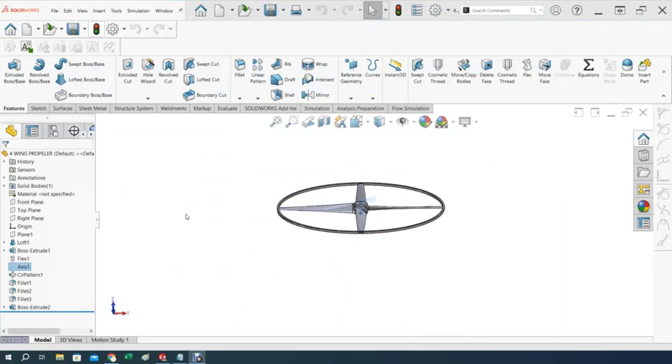So this is what we're going to do. Let me show you how this propeller looks in SolidWorks. Here's the design - I did it with four blades, as you can see here, and this ring is for supporting the tips to avoid bending, so they kind of help each other.

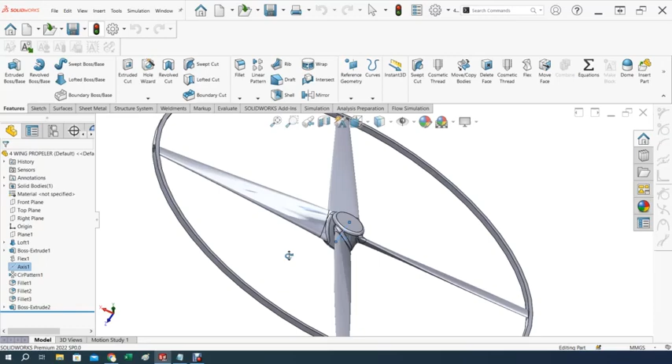This is going to be printed at PLA type of printing, and as you can see, there's an amount of flex that I've provided into it. So that's going to be the design - about 12 inches, 4 blades. That's what we're going to be doing in SolidWorks. So let's get busy.

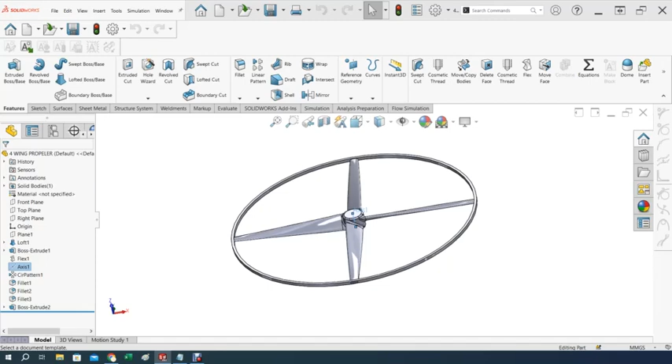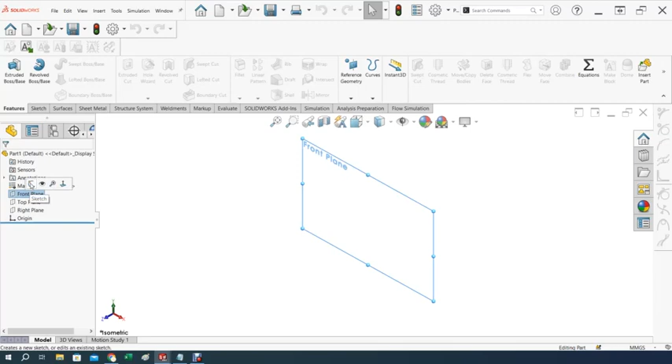I'm opening a new sketch here in SolidWorks so we can work out the details. Let's see, I'm going to work on maybe the front plane. That might do. Let's work on the front plane - I think that's the case.

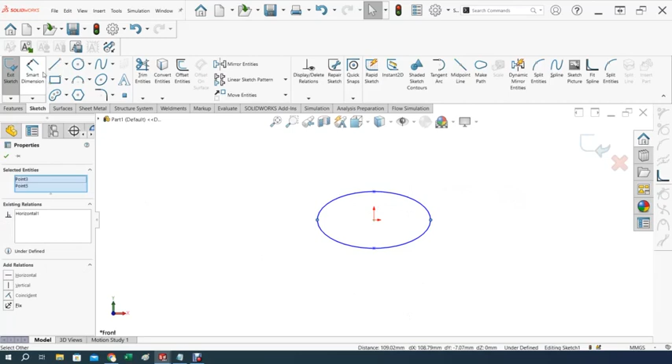For the front plane, let's work here and create an ellipse. Let me get out of here for a second and straighten this up. The dimension of this will be - this is the root. Let's say that's going to be about 20, about an inch, 25.4. That will do. And the thickness...

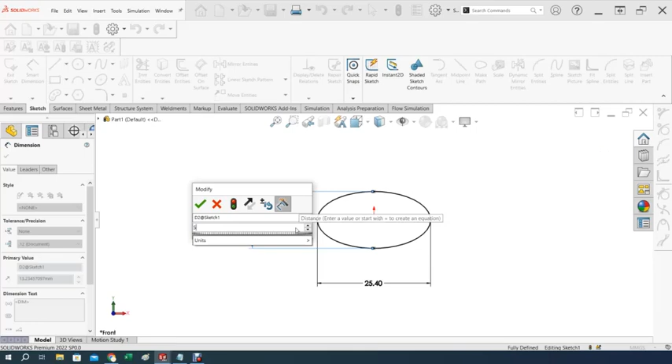Compared with a plastic blade of 12 inches, this is very thin. Remember, this is PLA - it's not as strong, so I cannot make it too thin or it will pop, it will break. So let's say, for the time being, you can change it - let's say 5 millimeters, and that will do.

So we have our first part. Let's accept this and take a look here, sort of in 3D, in isometric view, so we get it clear how this will look. Yeah, it looks good.

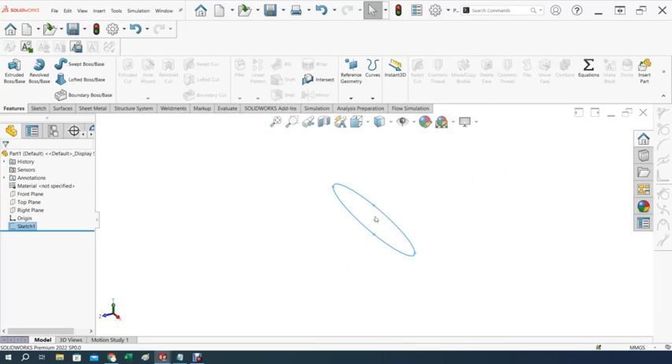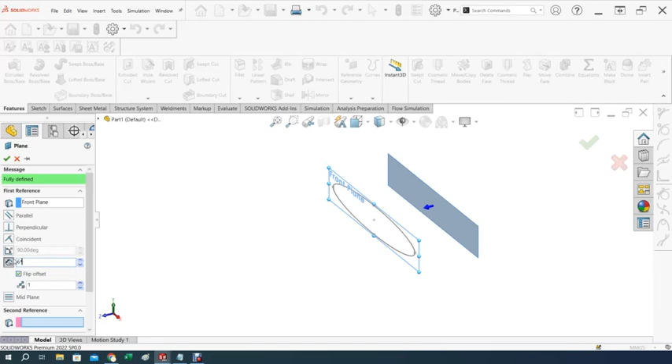What we're going to do is put here another one of these but smaller, on another plane - a reference plane. Let's say I'm going to invert that, and it's going to be about 6 inches. You can multiply by 25.4 and you get the proper distance of that.

Let's see where we are - about 152.4 looks good. So let's accept that for the time being.

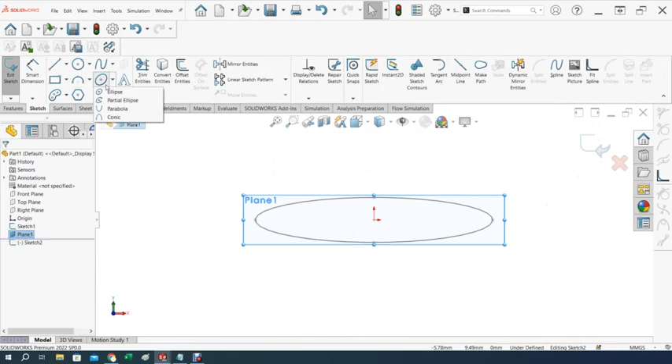Now let's work on this plane. We're going to work on this plane, and let's make a new sketch on that plane. Let's put that plane there we go. And now let's work on it, an ellipse as well.

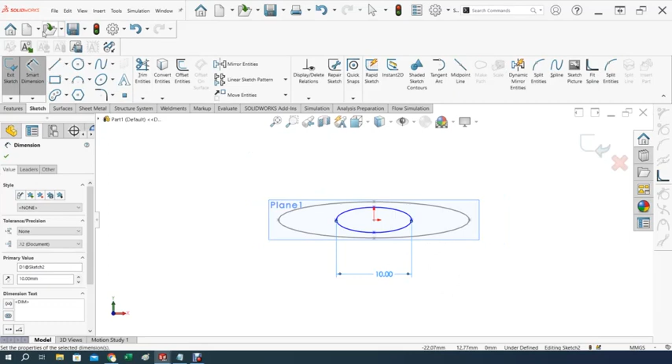Now this is going to be smaller - let's say 10 millimeters. As for the thickness, this is the part that requires a little bit of analysis to check whether it might be too thin or not. You could do about 3, maybe that will do, about 2 maybe for the smaller one. Let's say for the time being, 2 millimeters. All right, so now let's see what else.

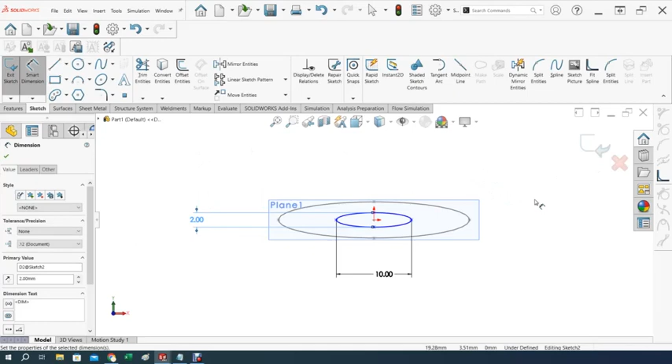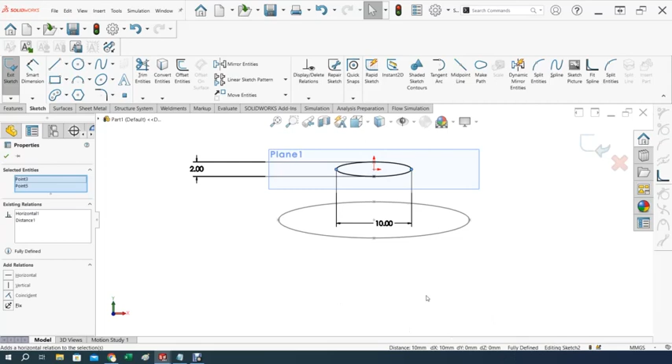Let me be sure that this is well aligned. Let me get out of here. Let's say that this one and this one are horizontal, and that defines my sketch, fully defined now.

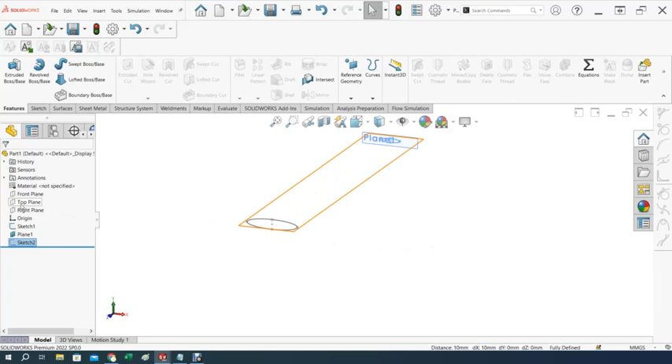So let's accept that. Now we have our design, and this is what we're gonna do. We're gonna work on - let's see, what plane would that be? Nope, that one. That one will do. Top plane, and let's do a sketch here at the top plane, and let's get this front, and let's draw, maybe a line will do.

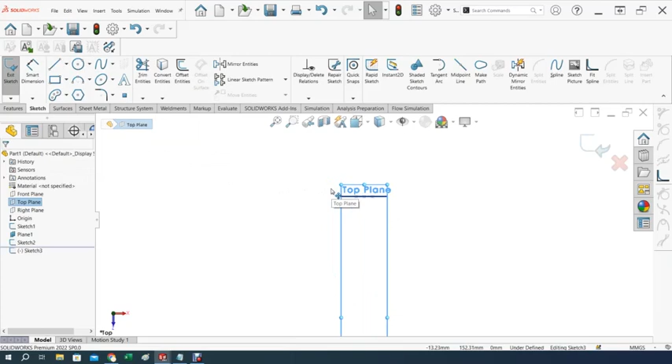I can use a spline from this point here. Let me get that plane so it doesn't bother me. So what I can do is get perhaps from here to here a line. Let's use a line, I'm not going to use a curve. It's going to be a line from this point to this point.

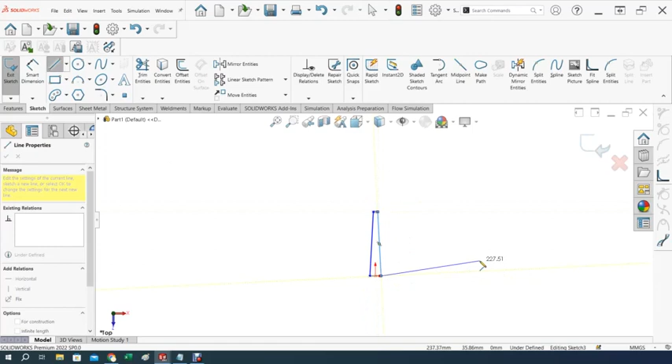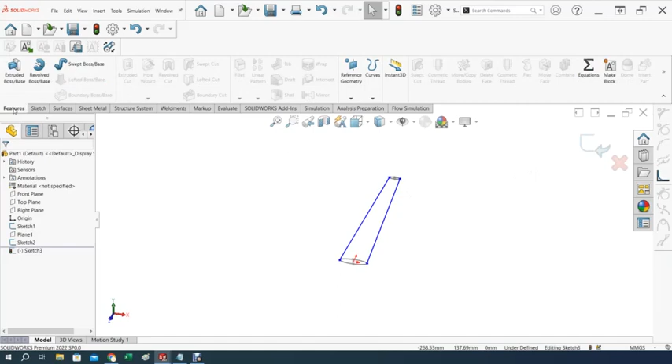Perhaps another line from that point to that one. So that looks good. Let's see. Yeah, you can see that the blades start to form right away. Now what we need to do is to cover that up. So we're gonna accept that. Actually, before that, let's accept it. Now we can do this.

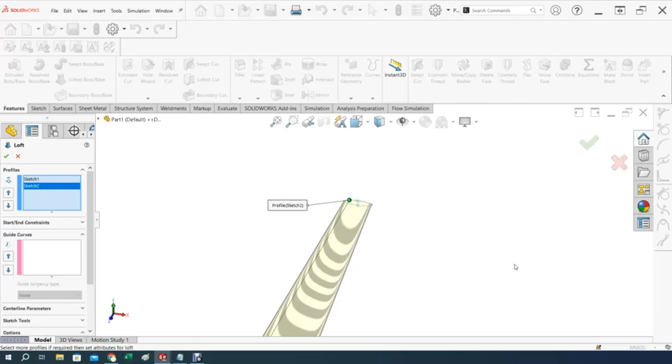Yeah, I know, we need 2 profiles. How about that one? In the same direction, pick the other one. That's 2. Now the question is, let's see how this looks like. Do I need to do anything else? It looked good, you see?

That's what I was telling you - you don't need any guide curves because it's a very simple and straightforward blade. Not a big deal. You don't have that kind of weird looking, like it bent here at the root somehow and then goes back like that. If you have that, then you have to put in guide curves, but not in this case because they're straight.

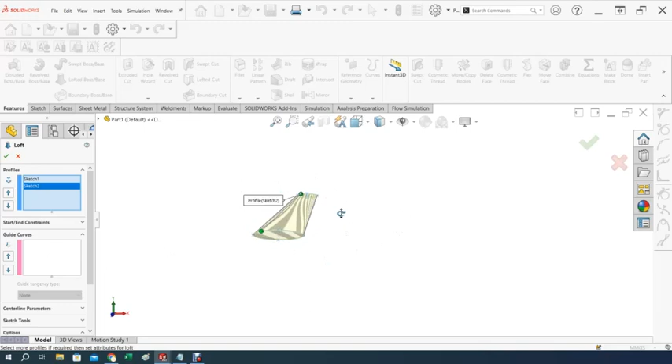So I think that we nailed that the way we want it. So we did that, let's accept that for the time being. Let's say yes, and it looked good. I don't see anything bad with that wing.

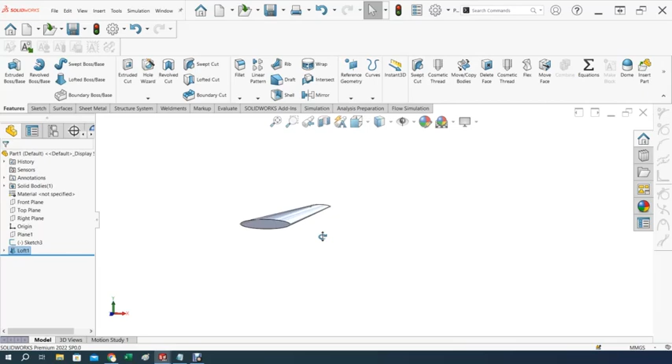Um, the next part - let me think about it, what should I do next? I think that we can start to work on the hub a little bit. So let's see which plane will be great to work on this. Top plane, definitely. So let's create a sketch at the top plane. Let's get this here, now let's work it right here.

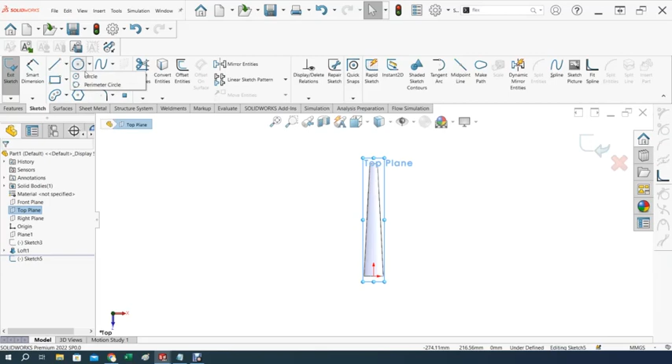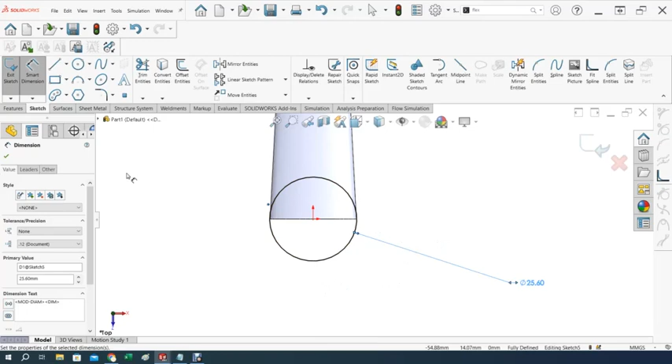So let's see, circle, it's gonna be right there. Now let's see, it's gonna be slightly larger. So let's see, 25.6, slightly larger than the wing to accommodate this tip inside. Now it's fully defined now, and what we're gonna do is, yeah, I don't care.

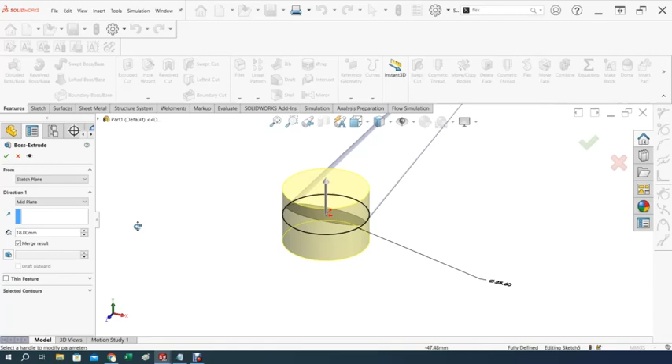Let's work on the extrusion, and it's gonna be mid plane. 18 looks good. So no, we don't want merge result. And let's see how this works now. Let's accept that.

And now let's do the flex and see. If you don't happen to have flex, remember you can look it up here on the command option, and you can drag it. Like for example, if I hit flex here, it's right there. You hit the left button on your mouse and drag it. That will do - in my case, I already have it.

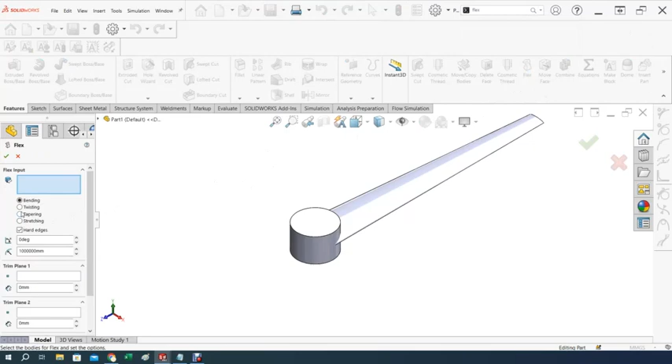So now let's do - it's gonna be what's gonna be, it's gonna be this part here. So the question is, we gonna start up to where? Where we want the full extension of the twisting, actually of the twisting. That will be - I got trim 1 and trim 2.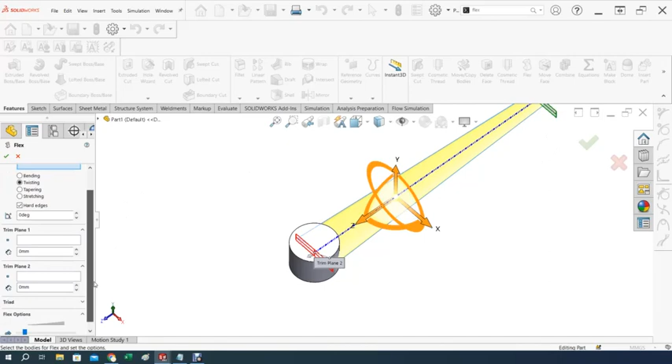Trim 1 is okay, now trim 2 is not okay. I want that to move somewhere here. So let's say trim 2 is about, I don't know, 28 maybe. Let's see - too much. 25. Maybe a little bit less. 20.

Yeah, that would do, it's right after the hub. I can twist a little bit more, but that looks good there. Let's see how that looks like.

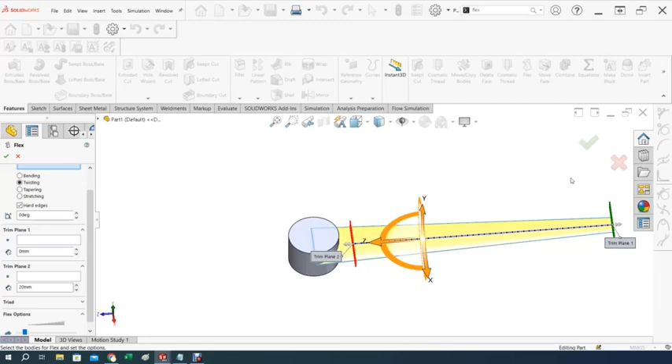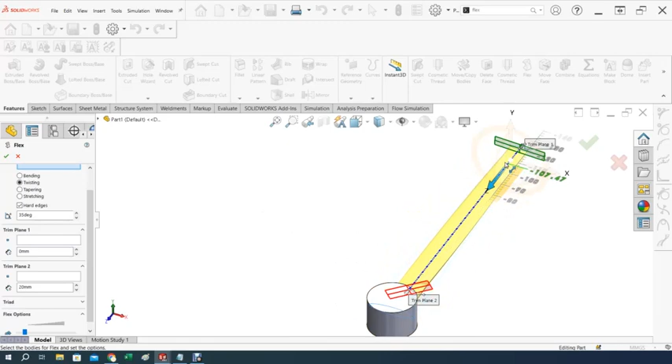And now what we want is 35 degrees, about 35 degrees. But how we gonna do that? We're gonna do that by moving this back, so this stays where you want it, and the twisting shows up here. So this is horizontal and this has the 35 degrees.

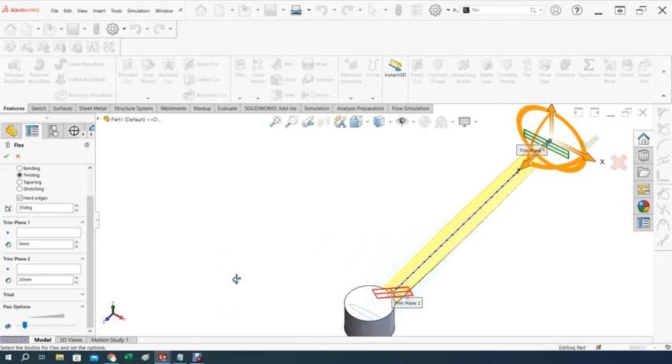That looks good, let's see, anything else? Looks good. So this is the leading edge, and that's the back edge of the propeller blade. So I would say that will do.

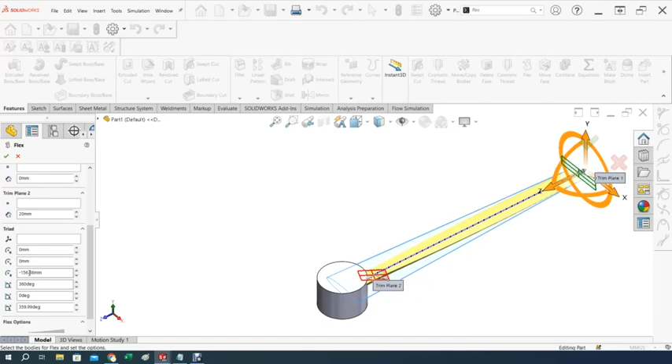It's about the distance of the blade in this case. Let's see.

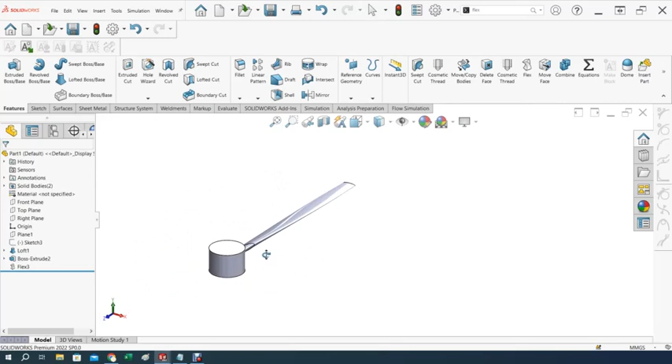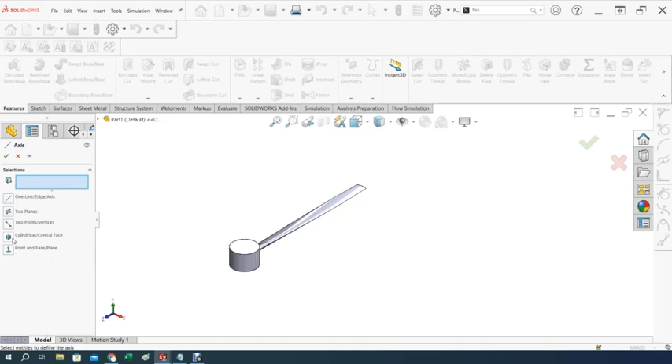All right, let's accept that, and we got a nice blade. How about the others? When you start to add blades, you want to be careful not to interfere one with another, because in this case what I need to do is add an axis here. Maybe we can use a reference geometry, an axis, and how about these? And this face. Yep, that will do. So now what I need is to go here, circular pattern, and let's see how this works.

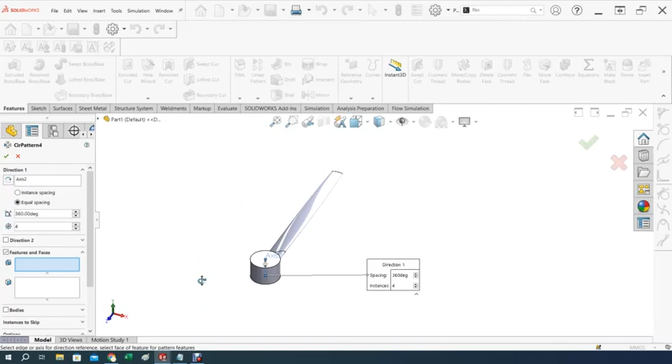Now features, we're gonna eliminate these and take bodies. Let's see, treat this as a whole body. Now, looks like it picked everything. Would it work? Let's see. There we go.

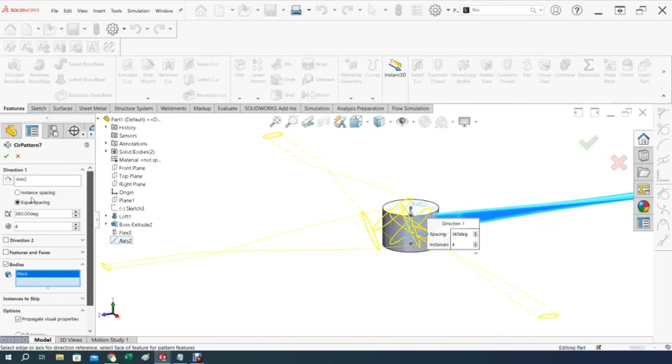As I treat these as bodies, I have 5 bodies here, that's the 4 wings and the hub. So that has to be combined at the end, but not a big deal. But that's pretty much it, I got my propeller pretty much done.

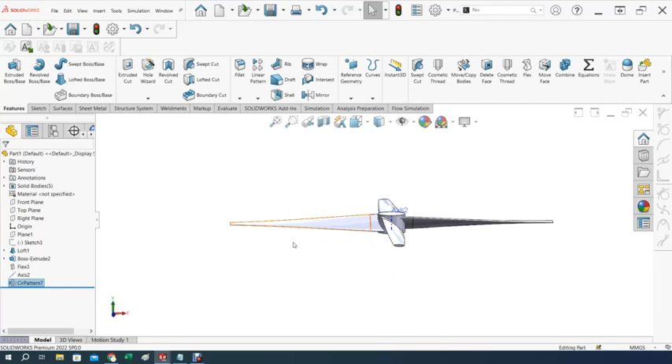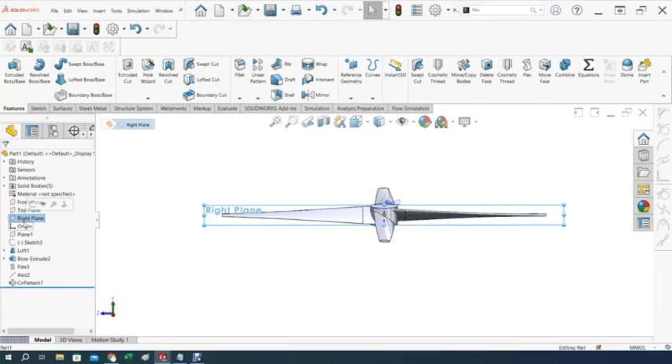What I'd like to do is add a shroud around it, just for support. So let me do that, and let's see how this will work. In which plane should I do that? Front plane, right plane, top plane. Actually that would do, let's see if I do it there.

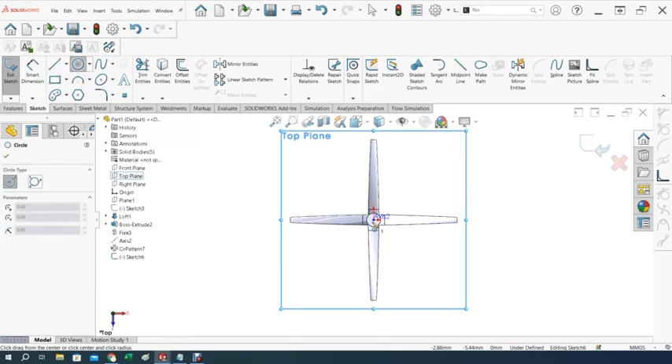Right plane, definitely top plane. Let's do a top plane, let's do it right there. And let me get this looking like that. And let's do one circle, that will pretty much look like this, and this is what we're gonna do.

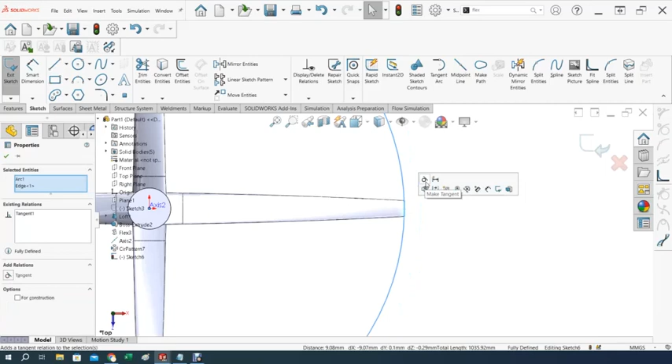Let's get out of here. I want this, and perhaps control that should be tangent. That will do, so now it's touching, and now the next part will be, let's make another circle for thickness.

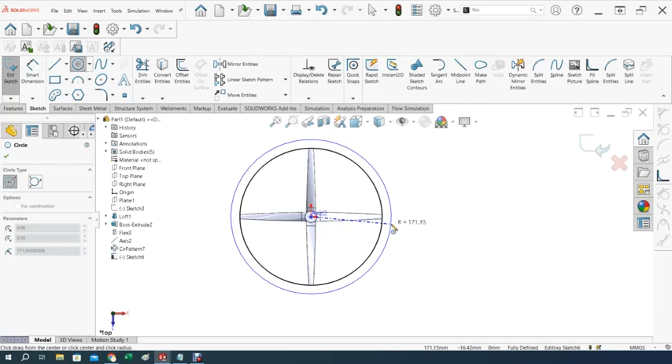I can certainly use an offset entity, but let's see. Actually, let's use offset entity, we're gonna be picking that one. 10 millimeters is way too much, it's gonna be about 2 to 3 millimeters, let's say 3 millimeters. Did I accept that? There we go.

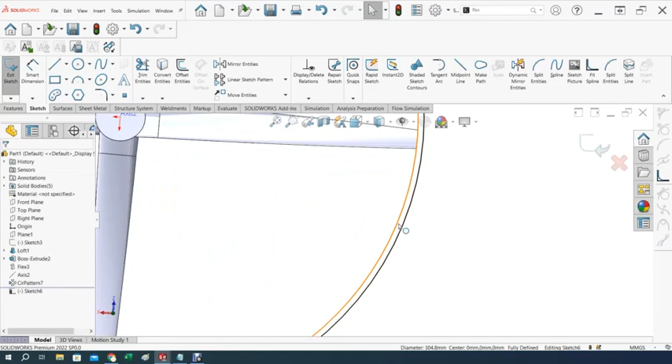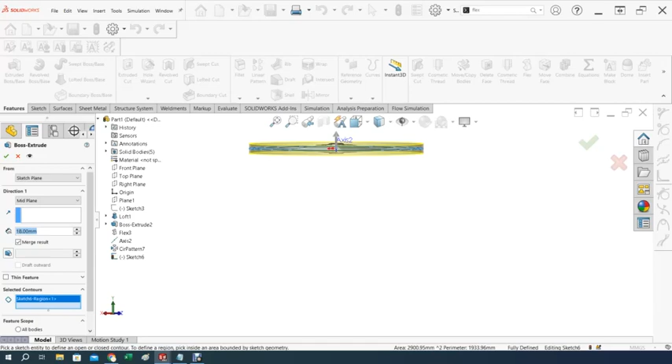It's right there, all right. So now features, extrude, selected contour. That will do. Now for that one, let's say, obviously this is way too much, it's gonna be about maybe 3. Let's see.

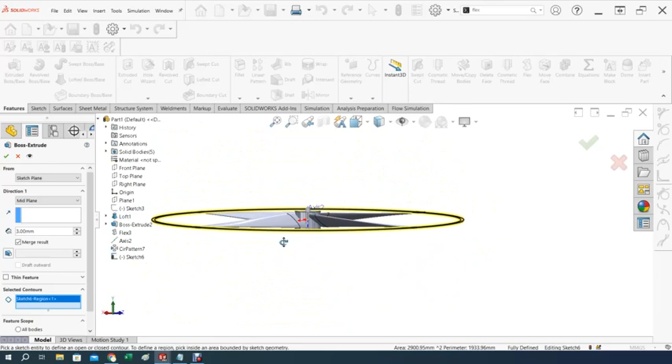It's for support only. I think we are done, 3 is more than enough. Let's accept that. And now we've got the protection to ensure the tip is kind of balanced along the way.

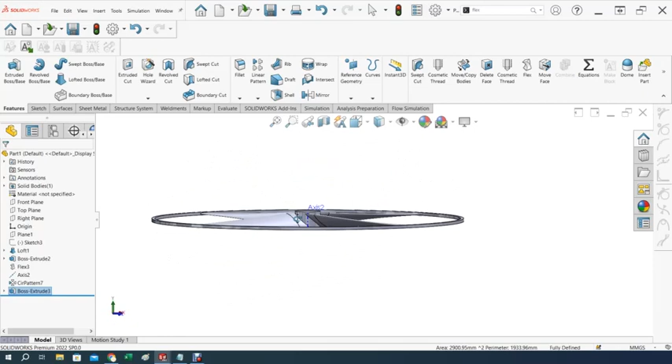Whether PLA will resist all those forces is something to be seen, but that basically is one design of this, ready to get the work done.

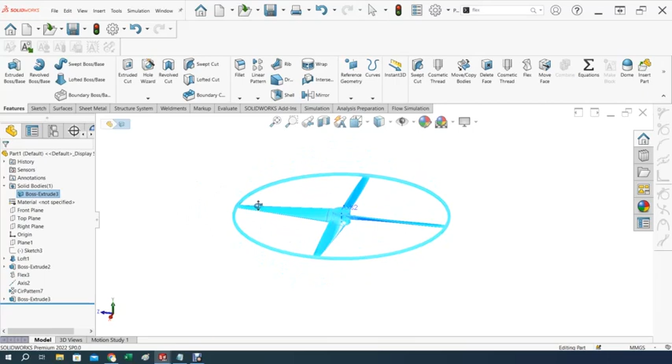Now the next part is combining everything. Let's see if I have it here somewhere. Split. I don't have the combine. Actually, but these, when I put the, I do that extrusion, it combines all the bodies in one, which is great because that's basically what I want.

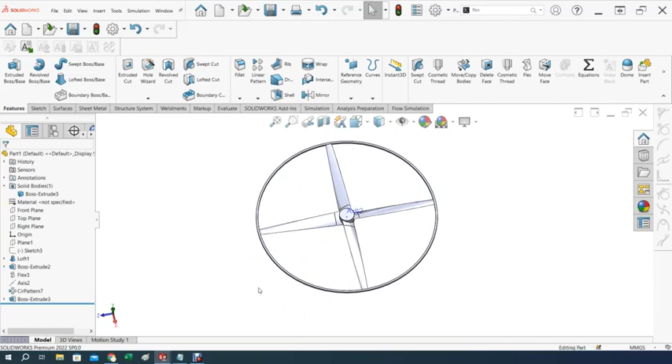Anything else? We are ready to do some analysis on this. Actually, I'm gonna make this hub a little bit better for the proper connection with the motor and see what happened. But that's the design, nothing more to it.

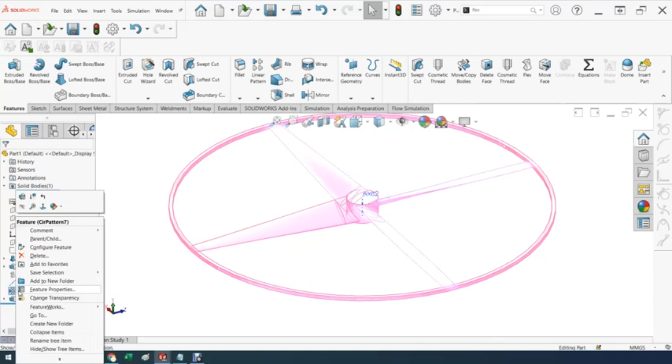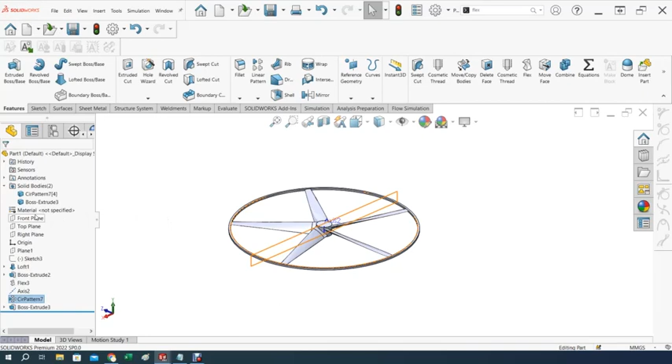Although I have two bodies here, and you have to fix it for a single body. For a single body you will have to combine, and that's why I have this here. Now it's showing up because I have two bodies combined, so you can combine.

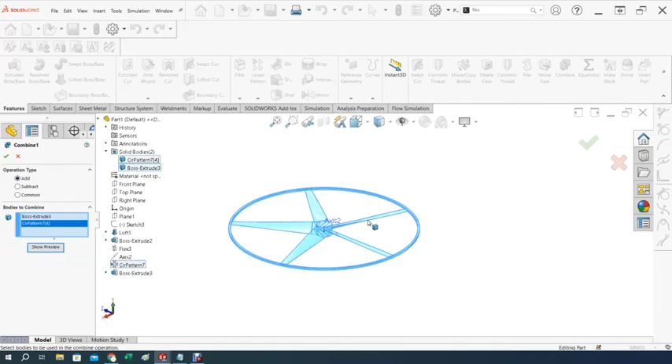So that will be an add operation type, add that one with this one, and there we go. One body only, back again.

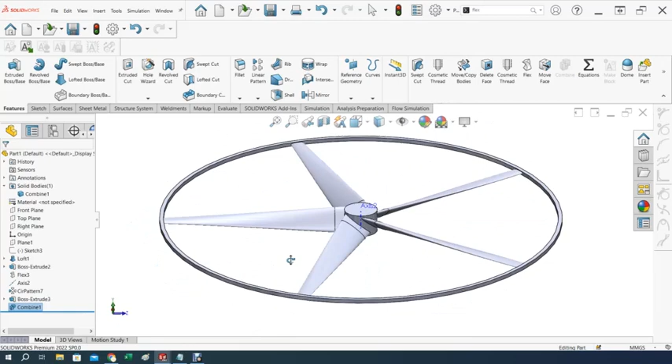So it looks good, I think this propeller is kind of promising. It looks good for also for a quadcopter or something like that. It's a 12-inch blade, so basically...